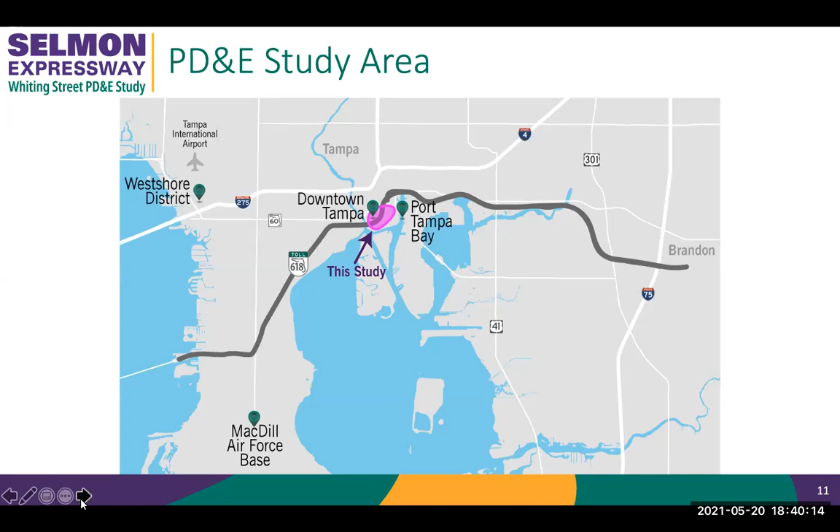So let's talk about the PD&E study area. The Selmon Expressway provides a critical connection within our community and region. It serves as an alternate route to the interstate and is a key component of the state's strategic intermodal system. It also serves as a designated evacuation route, and over 200,000 daily travelers use this portion of the road.

I talked about our commitment to connect Whiting Street to Meridian Avenue. We would have to remove the railroad tracks in order to do that, and that alone would help us restore the grid network in this area. But the city of Tampa is a Vision Zero city, and THEA is always looking for ways to help with Vision Zero initiatives. The alternatives were developed with pedestrian safety and walkability in mind, in addition to connecting the center portion of downtown Tampa to the east.

We are excited about how downtown is changing and growing, and we are committed to being part of the solution that makes getting around safer and easier for all. To honor our commitment to connect Whiting Street to Meridian Avenue, we have to reconfigure some ramps and realign others. There are 4 locations that we will look at tonight.

Location A, Whiting Street from Meridian Avenue to Brush Street. Location B, Whiting Street from Brush Street to Jefferson Street, and a new intersection at the end of a new Whiting Street exit ramp. Location C, Jefferson Street entrance ramp and a new Whiting Street exit ramp. And location D, removal of exit ramp 6B and reconstruction of exit ramp 6A, better known as the Florida off-ramp and the Channelside off-ramp.

Tonight, we are presenting the alternatives we've developed, the process we have taken to get there, and the advantages and disadvantages of each alternative. We will take the comments we received tonight to refine the alternatives and move to the next stage of the study. As we are looking at this area, there are several conditions and constraints that we took into consideration.

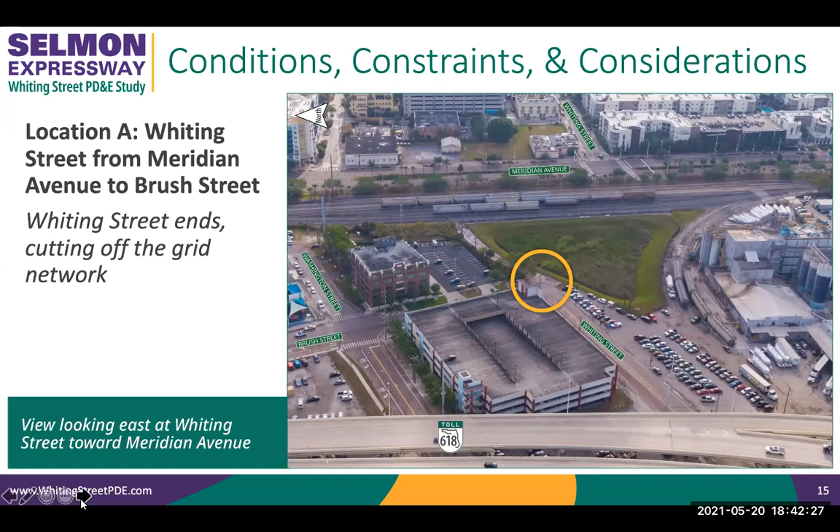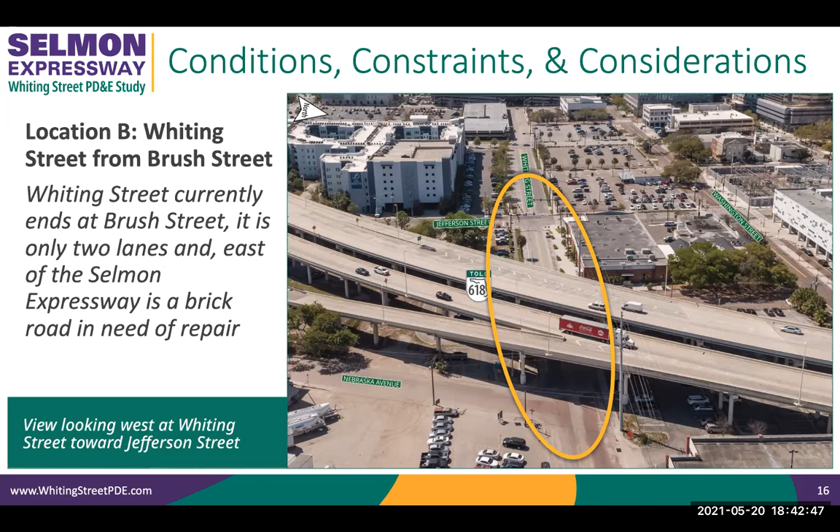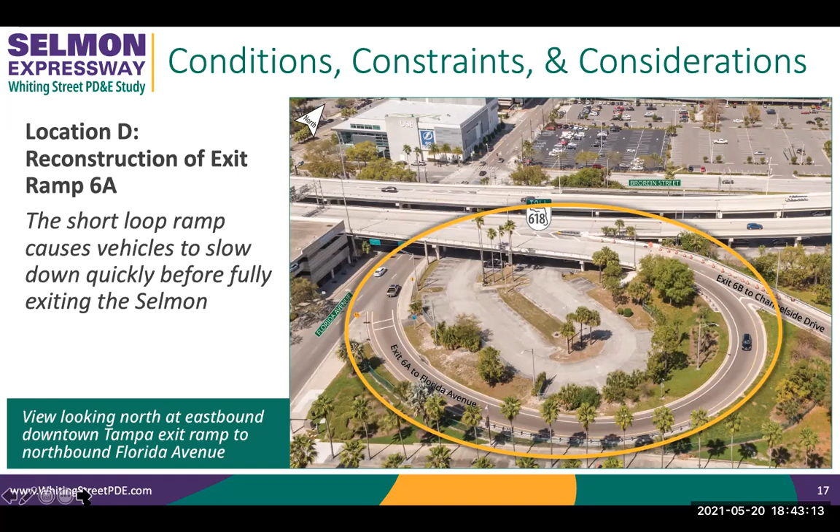For location D, the reconstruction of the Florida Avenue exit ramp. Here's exit 6A. The tight radius of the loop ramp makes vehicles slow down quickly. Because the ramp is only 1 lane and it is a tight radius with no real vehicle storage, it can cause a backup onto the Selmon Expressway. In addition, the end of the ramp is a free flow intersection that can be challenging for pedestrians trying to cross at the end of the ramp and for drivers who are trying to merge onto Florida Avenue.

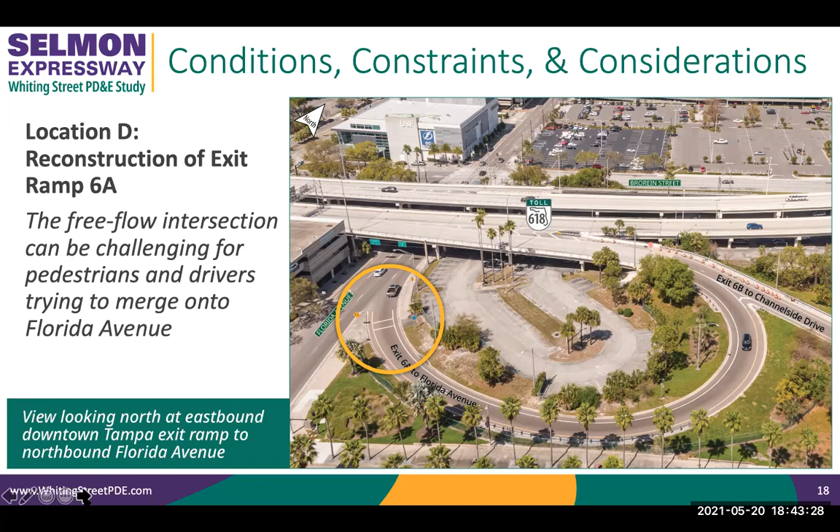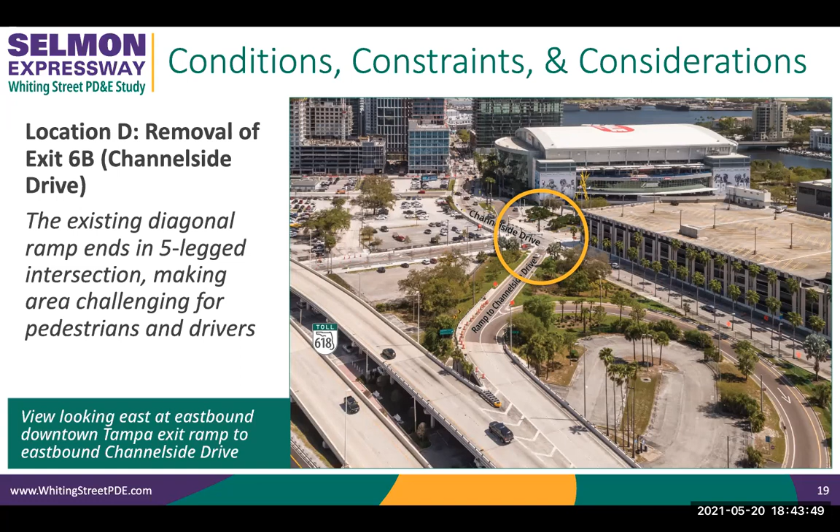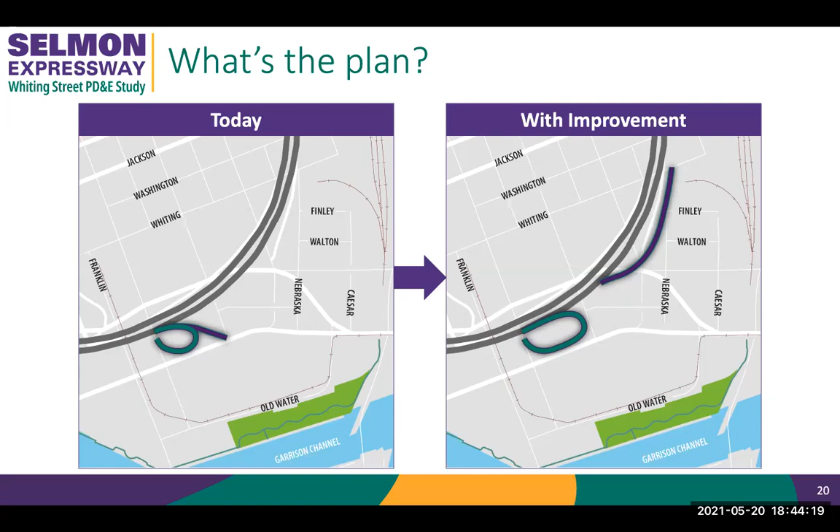So what's the plan? Because of these conditions and constraints, there are 5 things that we are going to do to help with the original goal of connecting Whiting Street to Meridian Avenue in a safe manner for both pedestrians and vehicles. Today, the exits 6A and 6B are close together. We will be moving the exits further apart and creating an oval at the Florida Avenue exit ramp. This would basically get rid of the Channelside 5-legged intersection and create a new Whiting exit ramp.

So let's talk about the plan changes, and let's start with the improvements at location D. At location D, we would remove the existing 6B exit ramp, that's the Channelside exit ramp. When we remove the ramp, we would lengthen the loop ramp and realign it to widen the curve. This would make more room for vehicles that need to queue at the end of the ramp and allow vehicles a longer distance to slow before reaching Florida Avenue.

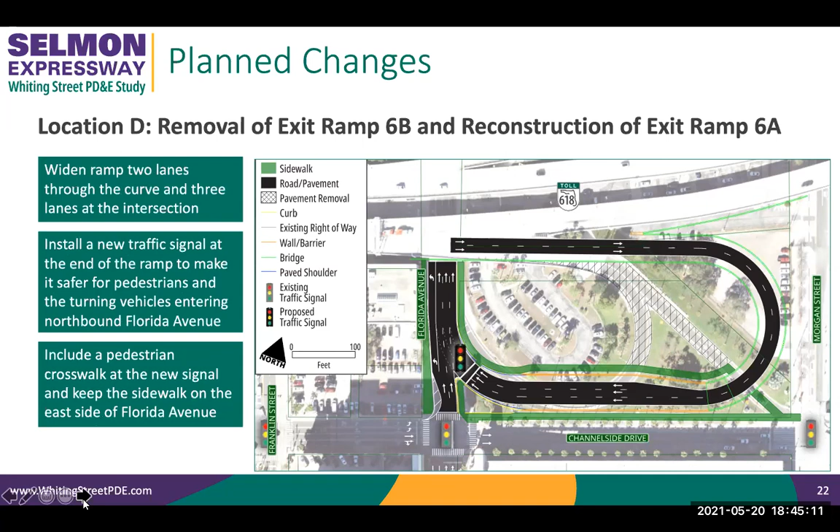By changing the loop ramp, we would be able to build it on an elevated structure. This would create a larger open area under the loop ramp for pedestrians to pass through from the parking to points of interest on Channelside Drive and Morgan Street, such as Amalie Arena. This would also widen the ramp to 2 lanes through the curve and 3 lanes as it approaches Florida Avenue.

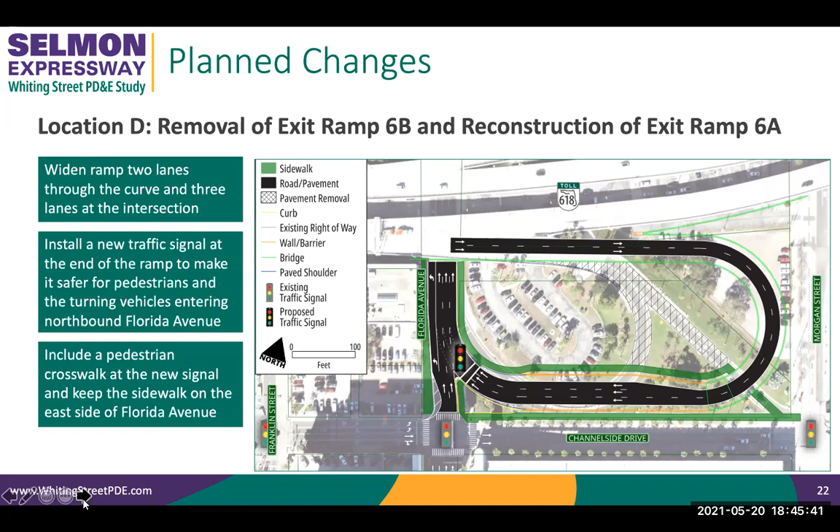A traffic light would be installed at the end of the ramp to make it safer for pedestrians and for vehicles using the exit ramp to merge onto northbound Florida Avenue. This would also make it easier for drivers that need to turn right on Brorein Street so they don't have to weave with the vehicles coming off the exit ramp. A crosswalk would be installed at the new traffic signal, and the sidewalk on the east side of Florida Avenue would remain.

The other changes that we will be making include a new Whiting Street ramp. This will become the new exit 6B. When this new ramp is constructed, it will cut Nebraska off to the north. So we will have to construct a connection from Nebraska Avenue to Finley Street. And finally, with the new Whiting Street ramp, we'll have to move the Jefferson entrance ramp to the north just a bit.

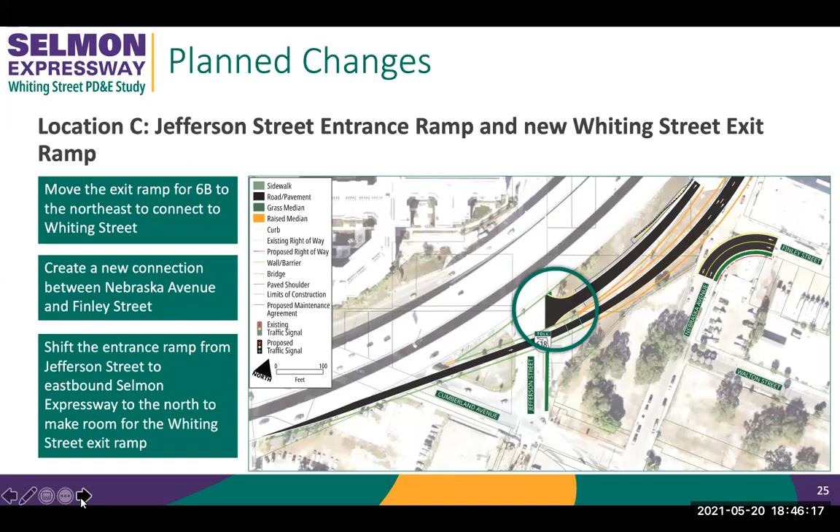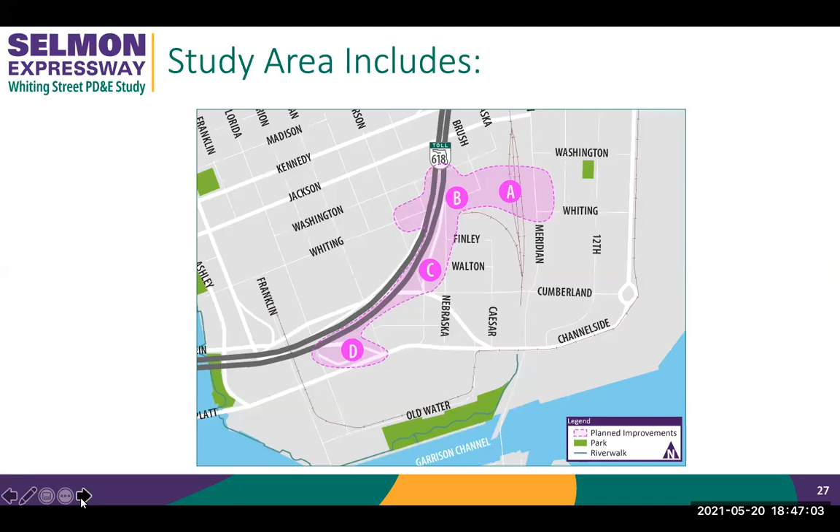So those slides were about the changes that we're going to be making at locations D and C. In the remaining 2 locations, A and B, we have 2 alternatives for each location. We'll start with location A, the Whiting Street connection to Meridian. Location A, alternative 1. Alternative 1 would extend Whiting Street to Meridian Avenue with a curved roadway connecting at the existing Whiting Street intersection to the south. Alternative 1 creates a 4-way intersection, but limits the ability to expand the grid network in the future. Alternatives 1 and 2 provide for a signal at Brush Street.

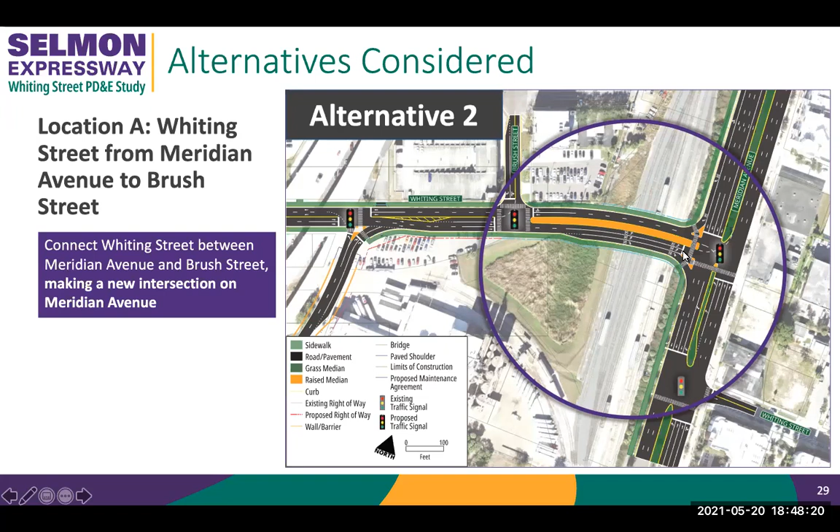Location A, alternative 2. Alternative 2 would extend Whiting Street to Meridian Avenue more directly, connecting north of the existing Whiting Street intersection. This would improve the grid network for this area and allow for the grid to be expanded in the future. In addition, because most of the traffic using Whiting Street here will be turning right or left and not continuing straight, this configuration allows for better operation and enhanced efficiency since both signals will work together. Alternative 2 allows for an additional crosswalk opportunity on Meridian, which would improve pedestrian convenience and safety. Again, both alternatives provide for a signalized intersection at Brush Street.

So let's look at the two alternatives for location A side by side. Alternative 1 is a four-way intersection with limited grid expansion opportunities. Alternative 2 is a new intersection where the signals work together and an additional pedestrian crossing on Meridian Avenue is added.

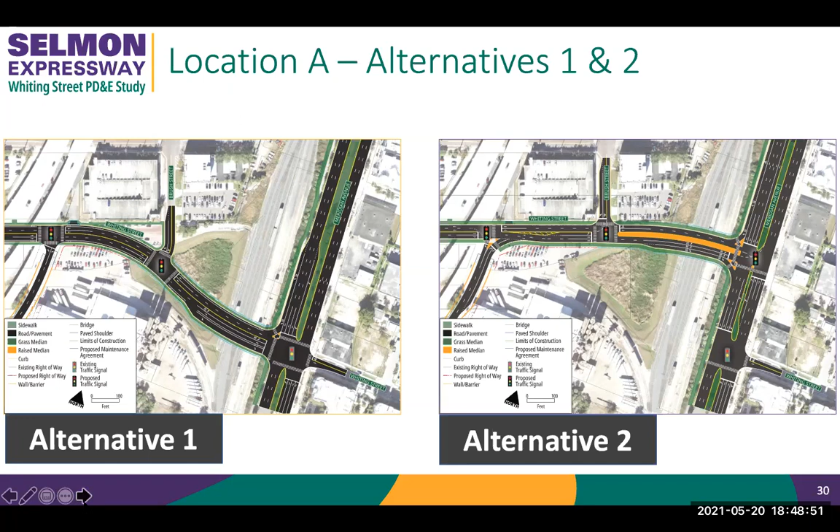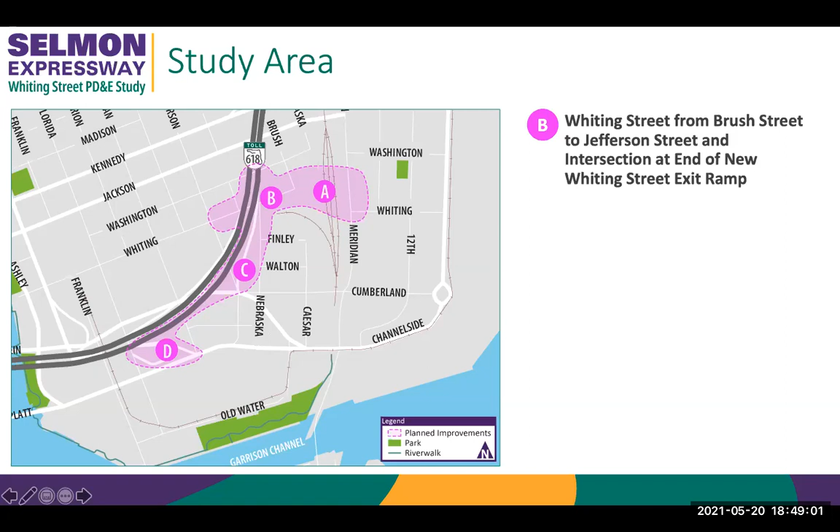Moving to location B, Whiting Street from Brush Street to Jefferson Street and the intersection at the end of the new Whiting Street exit ramp. Location B, Alternative 1. Alternative 1 would widen Whiting Street from 2 lanes to 4 lanes. It would provide bike lanes and 6-foot wide sidewalks on both sides of the road. The Whiting Street exit ramp would have 2 lanes, a dedicated left and a dedicated right.

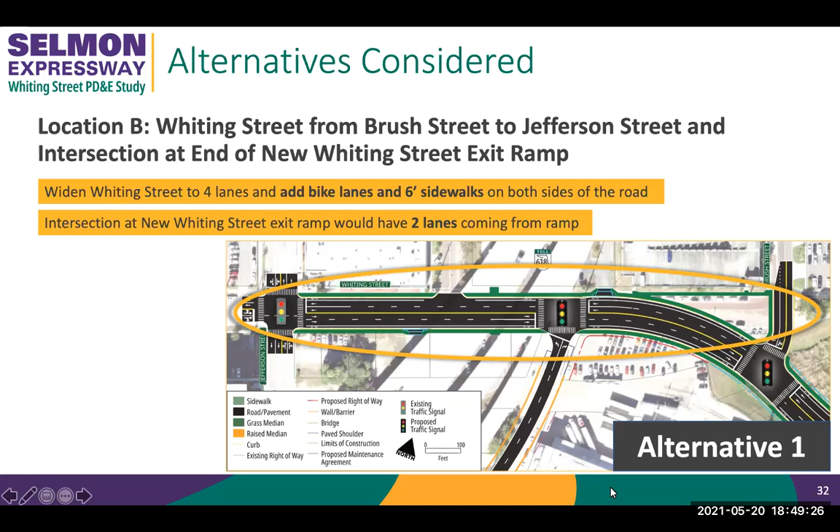Location B, Alternative 2. Alternative 2 would also widen the road from 2 lanes to 4 lanes, but with 10-foot wide sidewalks instead of bike lanes. This would encourage bicyclists to use the 2-way cycle track the City of Tampa has planned for Cumberland Avenue. This also provides for a pedestrian connection between the Selmon Greenway and the Meridian Greenway using the south side of Whiting Street. The Whiting Street exit ramp would have 3 lanes with a dedicated left and 2 right turn lanes. In addition to helping traffic flow with dual right turn lanes, Alternative 2 would have a pedestrian refuge at the intersection.

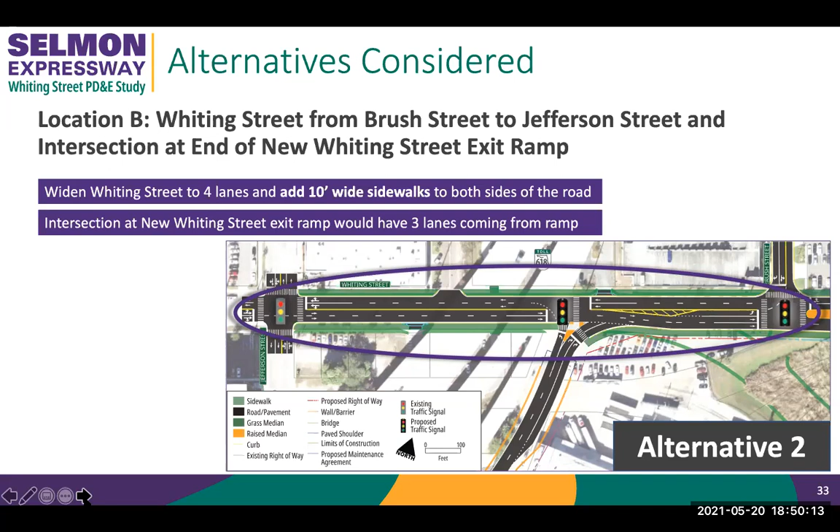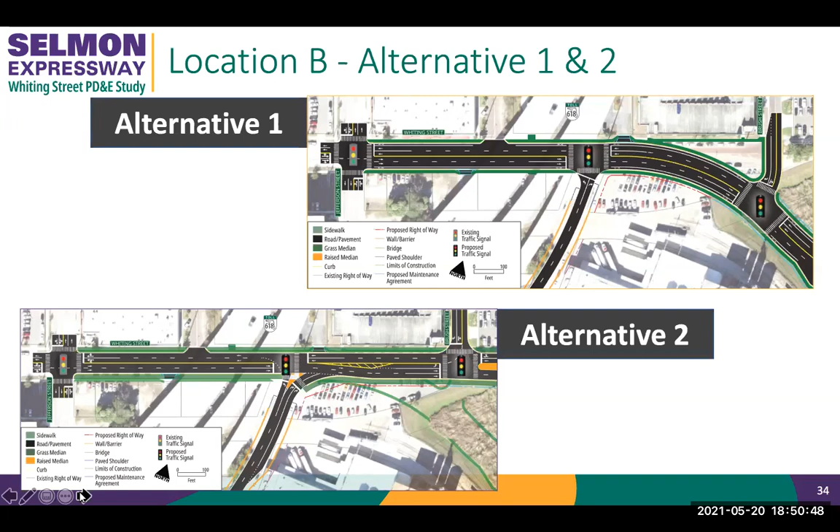So let's compare the alternatives of location B side by side. Alternative 1 is a 2-lane exit ramp with 6-foot sidewalks and bicycle lanes on Whiting. Alternative 2 is a 3-lane ramp with 10-foot sidewalks on Whiting and a pedestrian refuge at the intersection. Alternative 2 would encourage bicyclists to use the cycle track currently planned for Cumberland Avenue to the south.

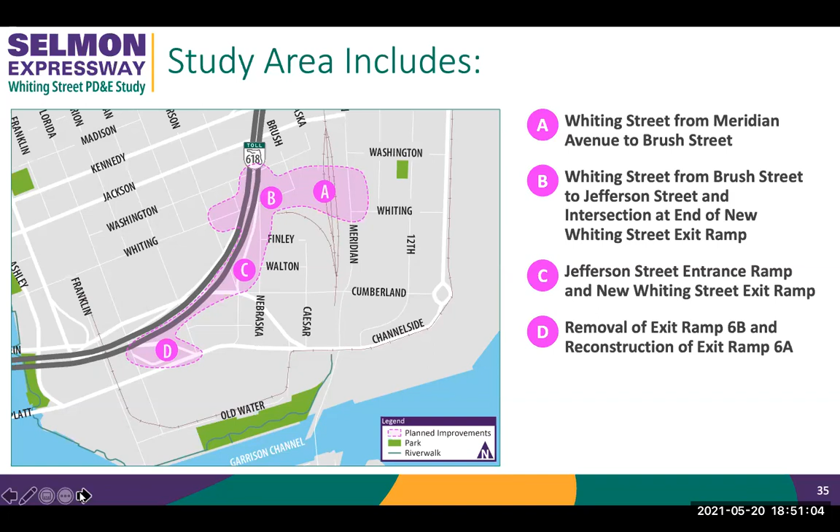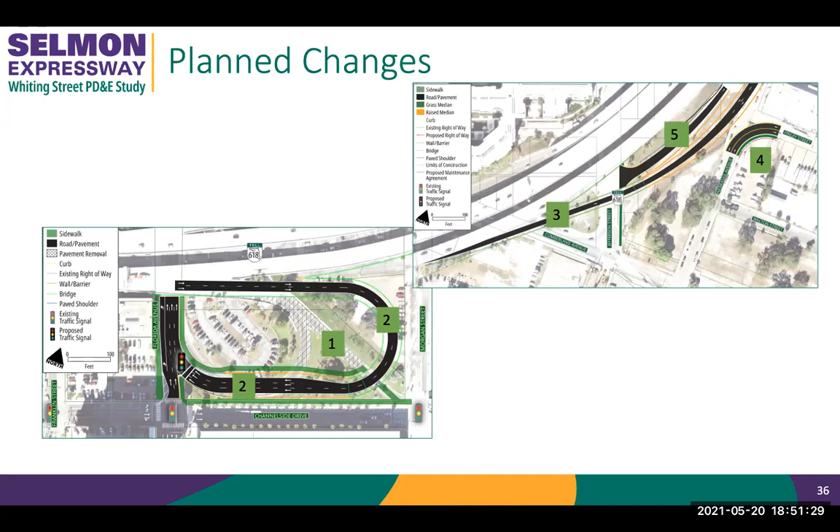So here again is the study area. We've talked about the planned changes and the alternatives at locations A and B. And let's recap what we've talked about. So the 5 planned changes: remove the Channelside ramp. Number 2, elongate and add capacity and pedestrian safety and sight lines to the Florida Avenue ramp. Number 3, construct a new Whiting Street ramp. Number 4, construct a connection for Nebraska and Finley. And number 5, move the Jefferson ramp on-ramp slightly to the north.

For all locations, Alternative 1. For Alternative 1, we would connect Whiting Street to Meridian at the current Whiting intersection. This would limit the ability to expand the grid network in the future. We would widen Whiting to 4 lanes with 6-foot wide sidewalks and marked bike lanes. The Whiting Street exit ramp would be 2 lanes, 1 left turn and 1 right turn.

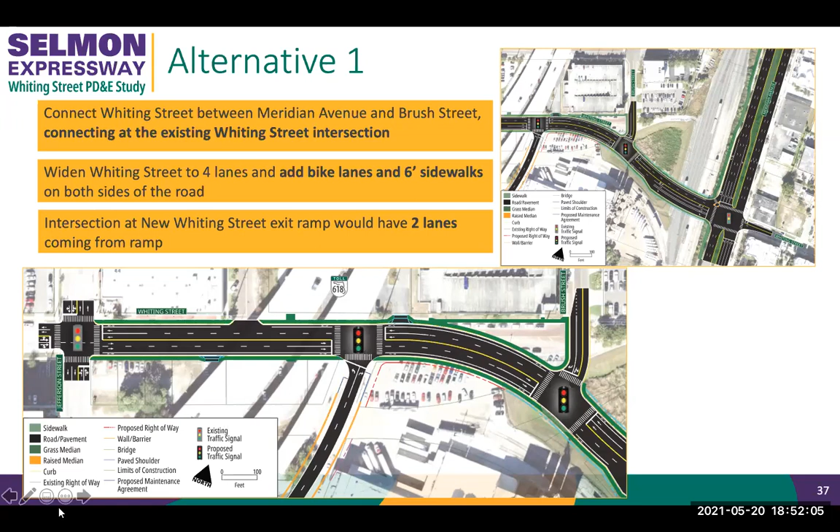Alternative 1 would require purchase of just under a quarter acre of land, which includes 4 parcels, 2 of which are businesses. The overall cost of the project, which includes design, right-of-way acquisition, and construction, is estimated to be $42.8 million.

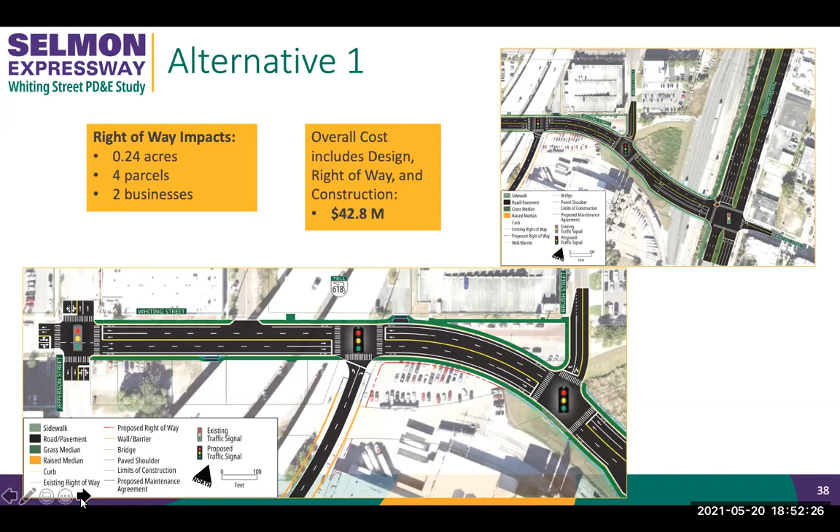All locations, Alternative 2. For Alternative 2, we would connect Whiting Street to Meridian at a new intersection, which would allow the grid network to be expanded later and would give an additional pedestrian crossing on Meridian. The traffic lights at both intersections would work together for a smoother traffic flow and safer pedestrian crossings.

Alternative 2 would widen Whiting to 4 lanes with 10-foot wide sidewalks on both sides of the road. Bike lanes would be provided just south of Whiting at Cumberland with the city's planned cycle track. The new Whiting Street off-ramp would have 3 lanes with 2 right turn lanes and a pedestrian refuge.

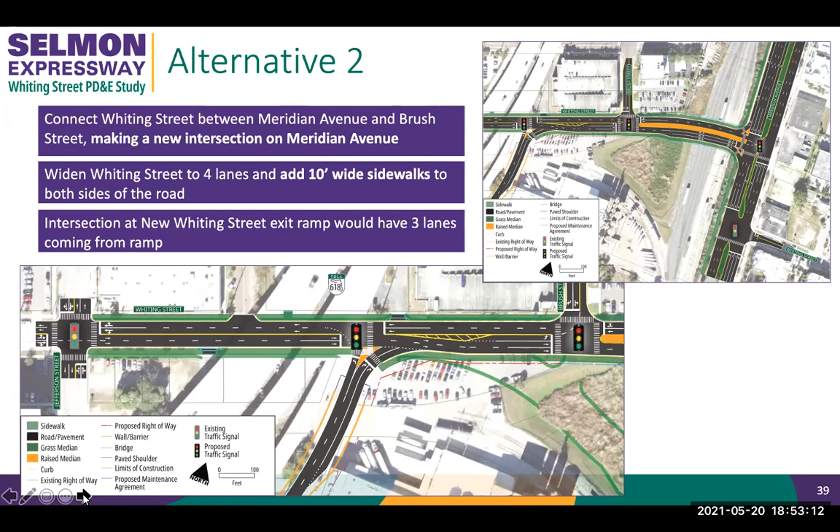Alternative 2 would require purchase of just under a quarter acre of land, which includes 4 parcels, 2 of which are businesses. The overall cost for the project, which includes design, right-of-way acquisition, and construction, is estimated to be $48.7 million.